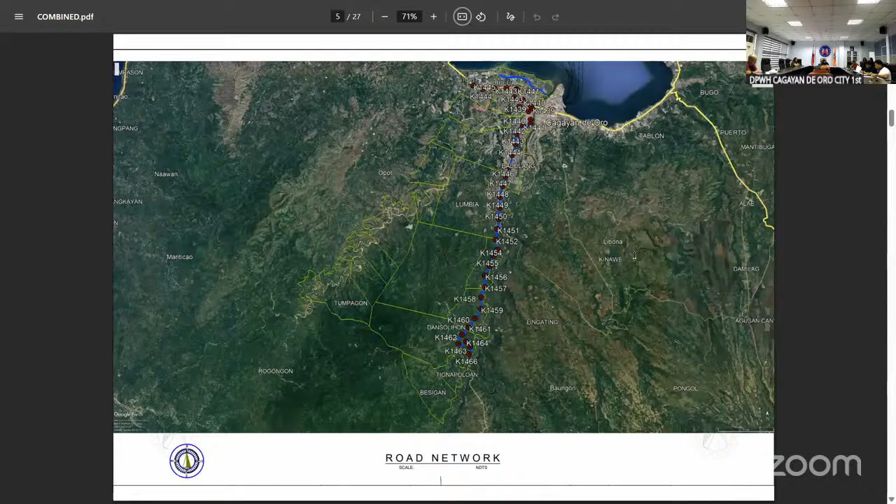There's also installation of solar LED roadway lighting with a height of 9 meters. So for the general drawing, this is located in Barangay Dansolihon. This is the vicinity map, and this is the site development plan. For specifics, this is the beginning, before the junction to the tertiary road. After this asphalt is the beginning, and the end is the station kilometer post 1462, after the junction of Dansolihon.

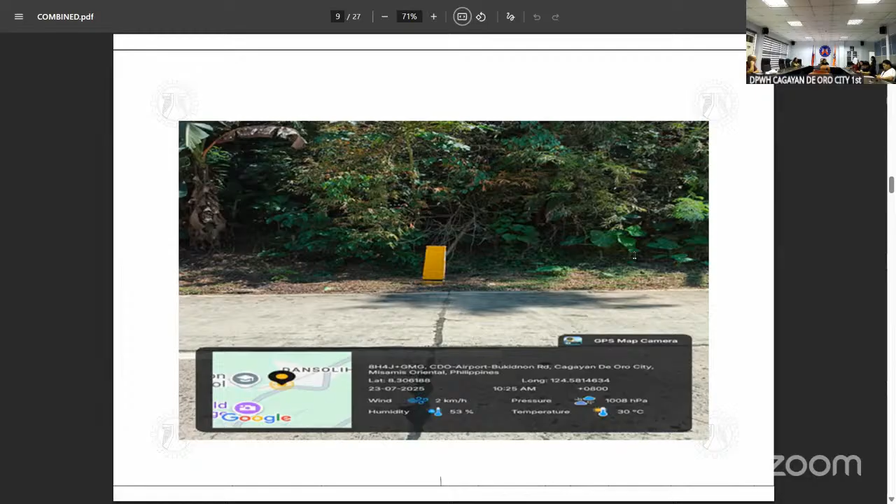So this is the disposal site plan. And for the plan and profile, this is the plan and profile.

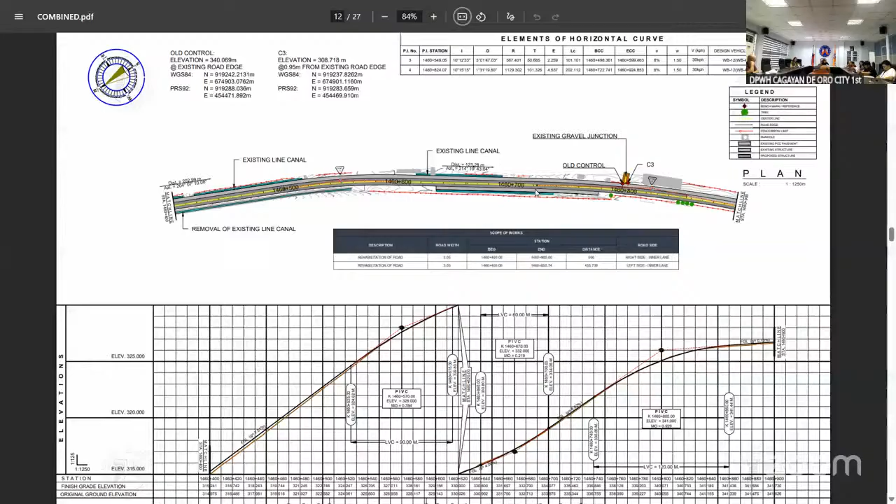So the scope of work is reflected here as per scope. You can see here there's a station limit at every scope of work, since not the whole length of this project will be rehab, since there's new roadway construction here. So for example, this one, there are limits to this rehabilitation. So this is a new paved road, the lighter gray. So the station limits of this project is reflected on this scope of work, also the station limits of the solar LED roadway lightings and the countings.

So this is the plan and profile, and this is the end. So this is the straight line diagram for clarification as to the station limits.

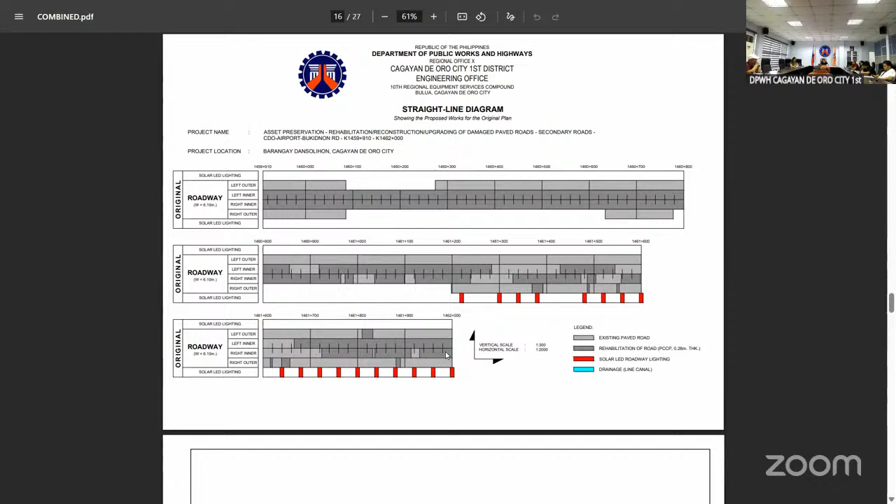So for typical drawings, this is the typical drawings wherein we have here, there's a section with 4 lanes. So again, this is the rehabilitation of inner lanes. There are also sections which have 2 lanes, so we will also have rehabilitation of these 2 lanes. Also this project is accompanied with reflectorized thermoplastic pavement markings and solar street lights, so you can see here on the right side.

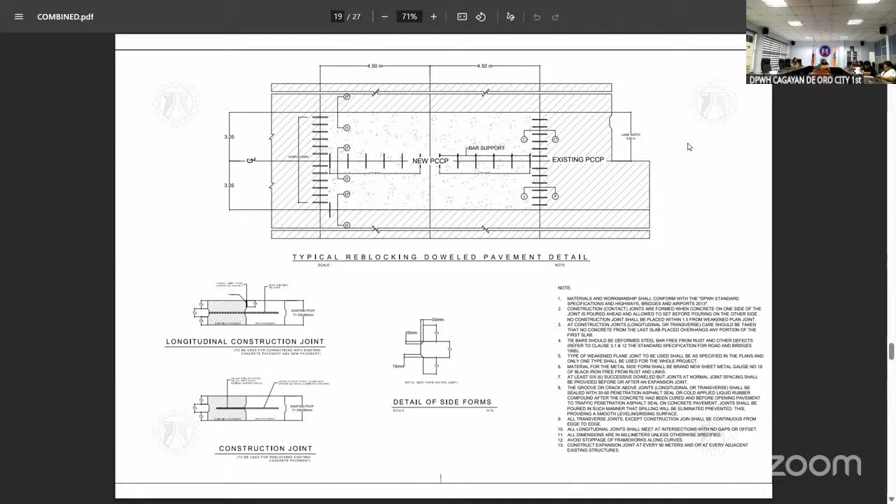So this is the reblocking details, the PCCP details or concrete pavement details, and geometric design standard drawings.

So for summary of quantities, we have here provision of field office for the engineer rental basis, 10.5 months. Permits and clearances, 1 lump sum. Project billboard and signboard, for each. Occupational safety and health program, 1 lump sum. Traffic management, 7.87 months. Mobilization, demobilization, 1 lump sum.

Removal of actual structure obstruction, 0.23 meters thick, PCCP unreinforced, 10,839.18 square meter. Surplus common excavation, 3,965.47 cubic. Structure excavation common soil, 28.51 cubic. Embankment from roadway structure excavation, 84.7 cubic. Gravel fill, 2.59 cubic. Aggregate base course, 2,167.84 cubic meters. Portland cement concrete pavement unreinforced, 0.28 meters thick, 14 days.

10,839.18 square meter. Reinforcing steel grade 40, 1,534.12 kilograms. Structural concrete, 13.18 cubic. Structural concrete painting works, 14.4 square meter. Reflectorized thermoplastic pavement markings white, 733 square meter, and for the yellow, 439.47 square meter. And for the single arm solar LED roadway lightings, 9-meter pole, 80 to 125 watts.

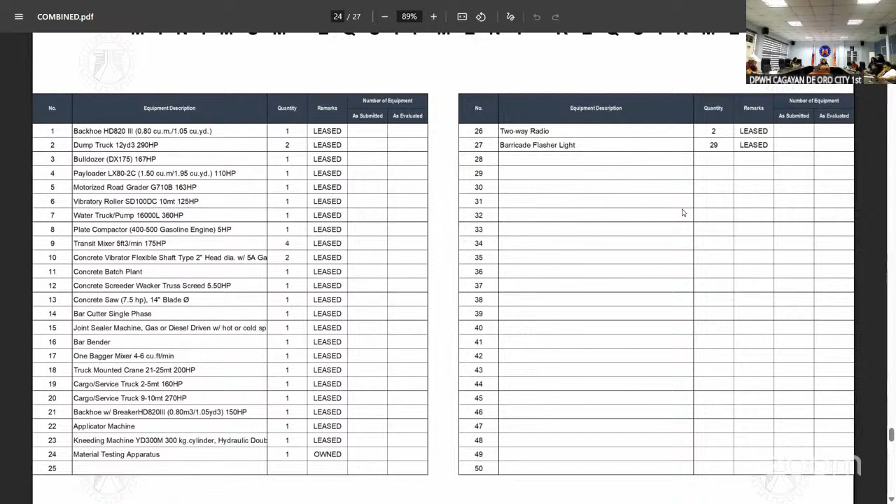For our traffic management, we have here two-way radio, again this is 2 leased, and barricade flasher light, 29 leased.

So for our inclusions of our pay items, we have here provision of field office for the engineer rental basis. The inclusion of this pay item is 20-footer container van with air conditioned unit furnished and maintained or equivalent, including 3 tables and 3 chairs. And for the permits and clearances, we have here NCIP permits and clearances as per memo order number R10 FBV 00395 series of 2025. So this is the specifications of our single arm solar LED roadway lighting.

So the rest of these slides are attachments. So this is the soil test reports. So that's all for this project. Thank you, and any questions?

So for the next budget, the programmer, engineer Aris Calizo, still will discuss the details of this project. Ahead, Aris.

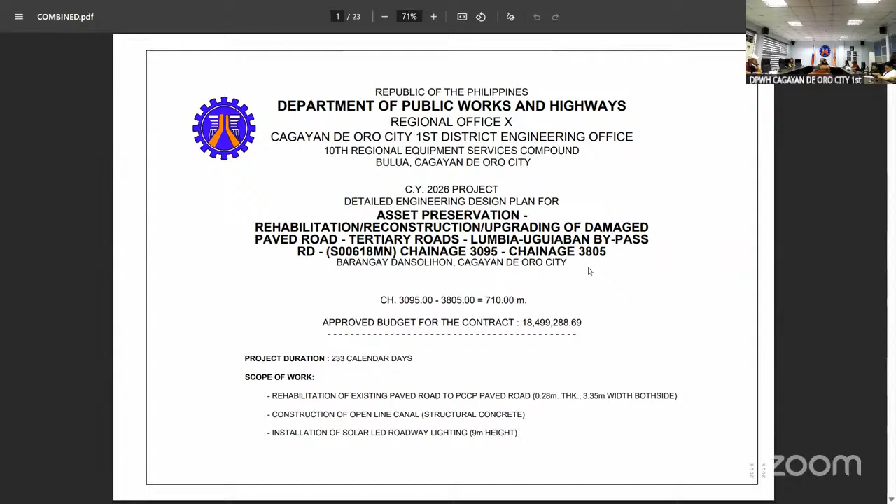There's also a construction of open line canals, material used is structural concrete, and also installation of solar LED roadway lightings, 9 meters high. So general drawing, again, this is located in Barangay Dansolihon.

This is at the bypass road, Mangalay. This is the end junction, the end section of this project, at the junction near the Talakag Bridge, boundary of Dansolihon to Talakag.

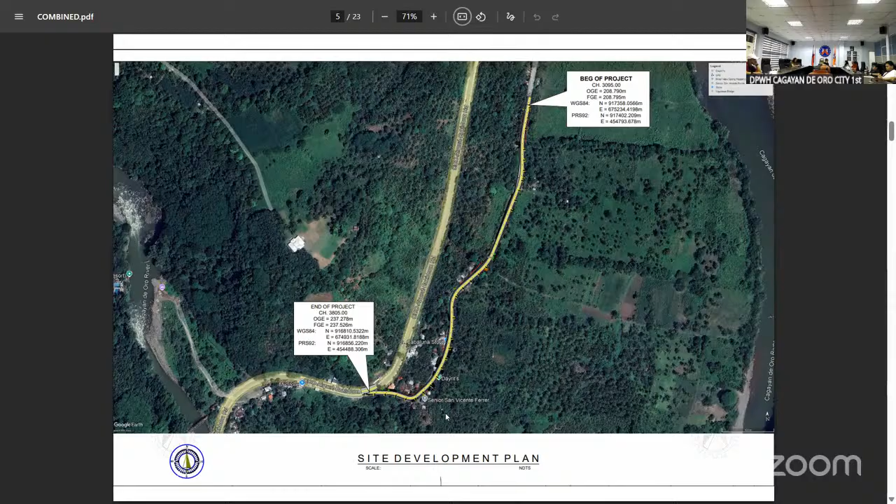So this is the site development plan. For specifics, again, this is the site images. We have here the beginning. After this asphalt road, we will be having the rehabilitation of road. And this is the image of the end.

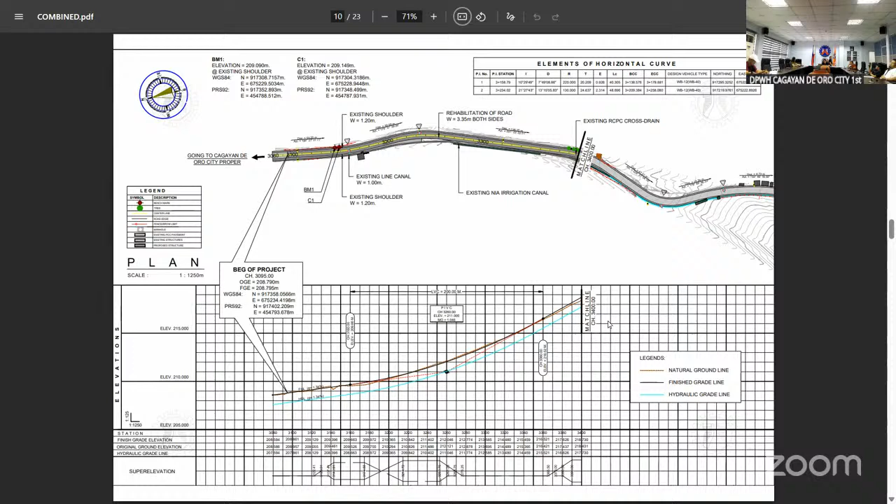So this is the site disposal site plan. For the plan and profile, this is the plan and profile wherein the scope of work is reflected. We have here the elements of curve and every scope of work. Also here we have the solar LED roadway lights location and the number, and again the every scope of work.

So for clarifications, this is the straight line diagram for clarity. For typical drawings, we have here the existing road is 3.35 meters both sides, and also in the site there's an existing shoulder which is newly built, which we will not be damaging. So we will be having a rehabilitation of the inner lanes, both sides, and also the construction of line canal.

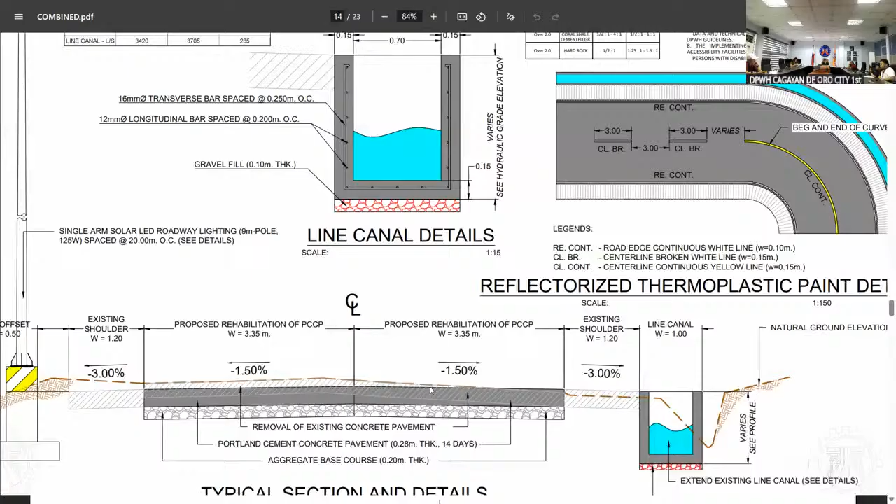This is the details. Along with this project, the whole length, there will be reflectorized thermoplastic pavement markings. So this is the details. Also, installation of solar LED roadway lightings. So this is again the reblocking details, the complete pavement details. So the geometric design standard drawings.

For the summary of the scope, we have here provision of field office for the engineer, rental basis, 7.77 months, permits and clearances, 1 lump sum, project billboard signboard for each, occupational safety and health program, 1 lump sum, traffic management, 5.8 months, mobilization and demobilization, 1 lump sum, removal of actual structure obstruction, 0.23 meters thick, PCCP unreinforced.

4,757 square meter surplus common excavation, 1,669.44 cubic meters structure excavation, 136.65 cubic meters, and gravel fill, 30.51 cubic meters.

For the aggregate base course, we have here 951.4 cubic meters. Portland cement concrete pavement unreinforced, 0.28 meters thick, 14 days.

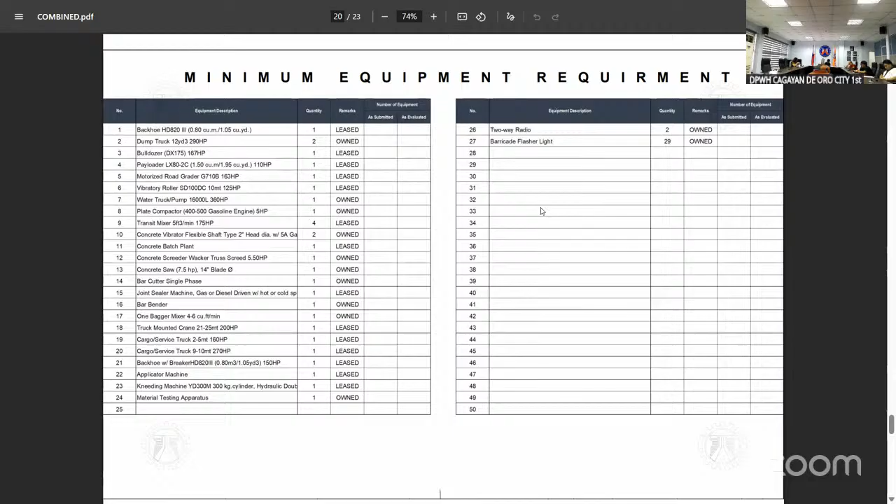For the minimum equipment requirement, we have here backhoe, 1 leased, dump truck, 2 owned, bulldozer, 1 leased, payloader, 1 leased, motorized road grader, 1 leased, vibratory roller, 1 leased, water truck pump, 1 owned, plate compactor, 1 owned, transit mixer, 4 leased, concrete vibrator, 2 owned, concrete batch plant, 1 leased, concrete screeder, 1 owned, concrete saw.

1 owned, bar cutter, 1 owned, joint sealer machine, 1 leased, bar bender, 1 owned, 1 bagger mixer, 1 owned, truck mounted crane, 21 to 25 metric ton, 1 leased, cargo service truck, 2 to 5 metric ton, 1 leased, cargo service truck, 9 to 10 metric ton, 1 leased, backhoe with breaker, 1 leased, applicator machine, 1 leased, kneading machine, 1 leased, and material testing apparatus, 1 owned.

For the traffic management, we have here two-way radio, 2 owned, and barricade flasher light, 29 owned.

So for the inclusions of our pay items, we have the provision of the field office for the engineer. The inclusion of this pay item is a 20-footer container van with air conditioned unit, furnished and maintained or equivalent, with 3 tables and 3 chairs. For the permits and clearances, the inclusion of this item is NCIP permits and clearances as per memo order number R10 FBV 00395 series of 2025.

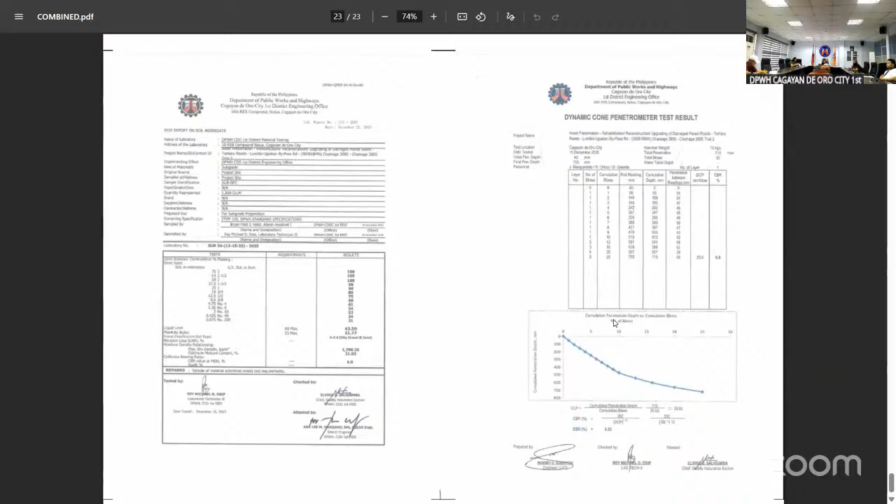Also this is the specification of our solar LED roadway lightings, 9-meter pole, 125 watts. So the rest of these are the attachments. This is the soil test reports. So that's all for this project. Thank you, and any questions?

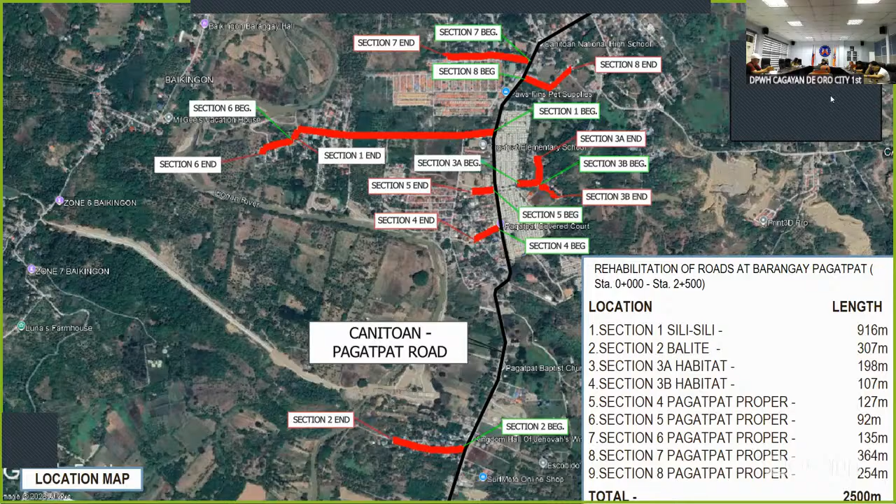Section 1, Sili-Sili, has a length of 916 meters. Section 2, Balite, 307 meters. Section 3A, Habitat, 198 meters. Section 3B, Habitat, 107 meters. Section 4, Pagatpat Proper, 127 meters. Section 5, 92 meters. Section 6, 135 meters. Section 7, 364 meters. And last, Section 8, 254 meters. The total length is 2,500 meters.

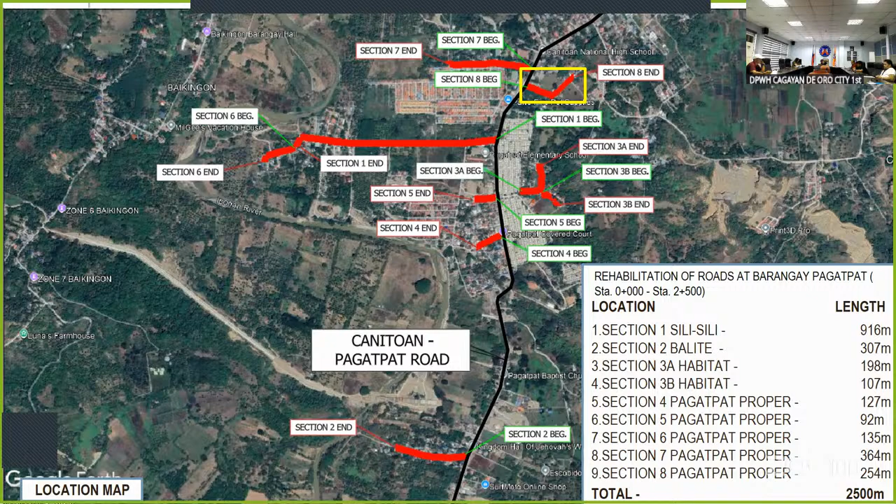This is the zoomed site image from Google Maps of Section 1, Sili-Sili. As you can see, the beginning of the project is near Pagatpat Elementary School, and the end of the project is near the Sili-Sili Covered Court. This is the plan and profile of this project.

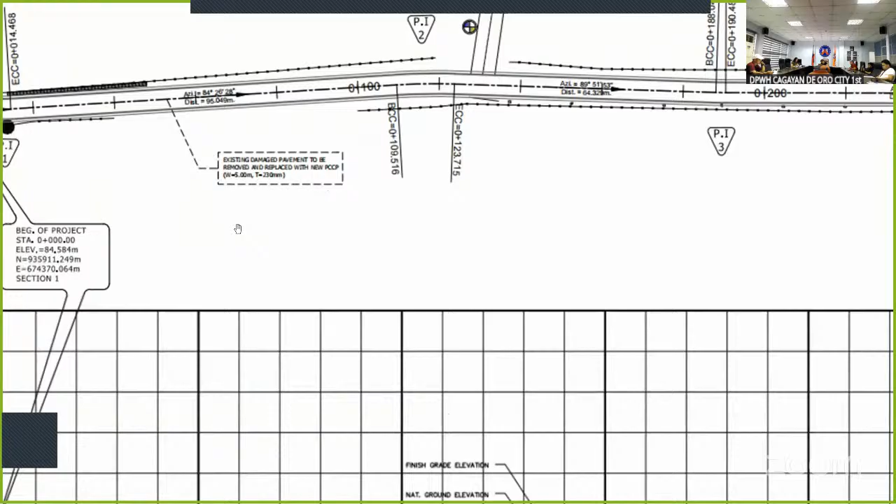The scope of works is existing damaged pavement to be removed and replaced with new PCCP. This is the site images of the beginning and end of the section.

In Section 2, Balite, we have 307 meters in length. The beginning of the project is near the Kingdom Hall of Jehovah's Witnesses, and the end of the section is near Laguna Residence.

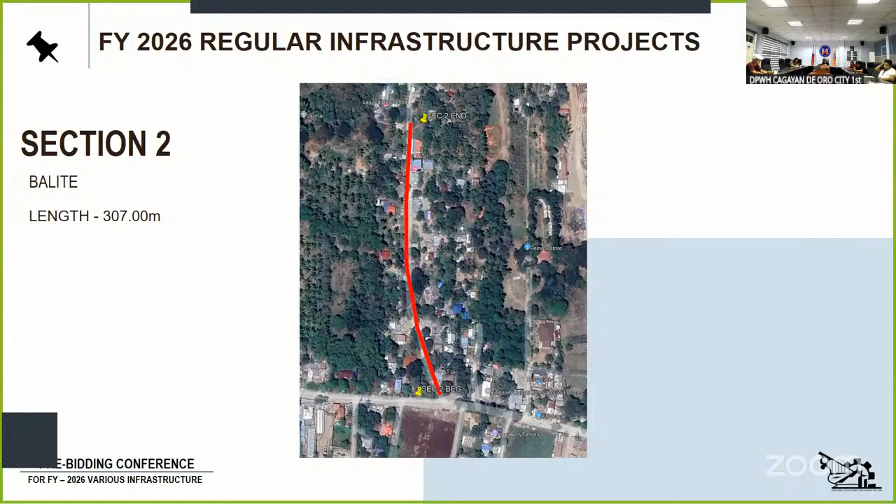This is the scope and the plan and profile of the section. The scope of works of this section is proposed construction of road. This is the site images of the beginning and end of the section.

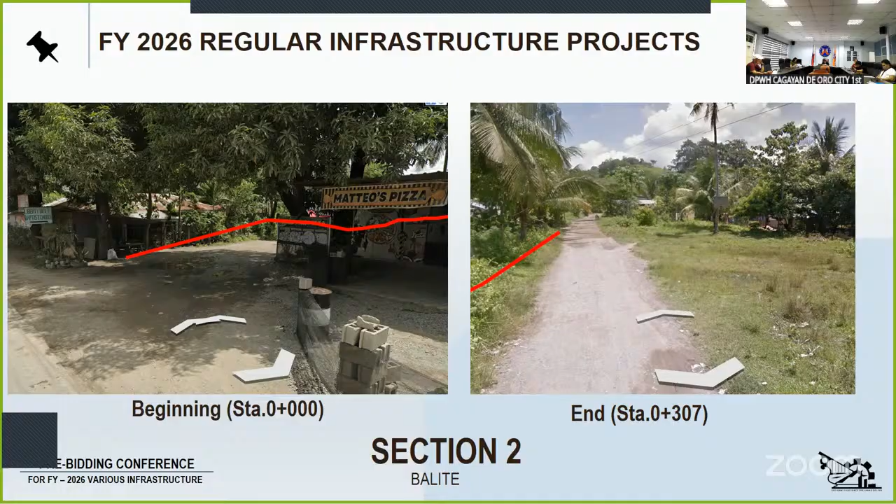So we have Section 3A, Habitat, with 198 meters in length. The beginning of the project is at the back of Pagatpat ECD Child Development Center. This is the plan and profile of the section. The scope of work is proposed construction of road.

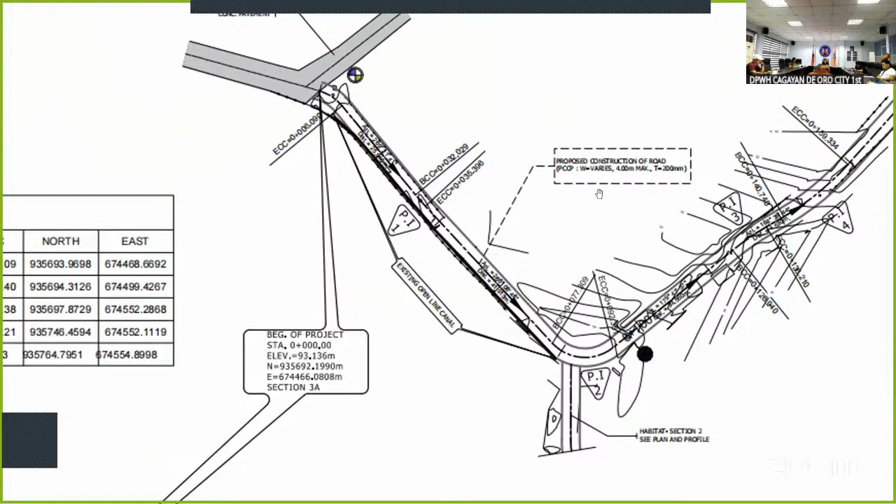So we have Section 3B, which connects to Section 3A. We have 107 meters. The plan and profile is the same. We have proposed construction of road.

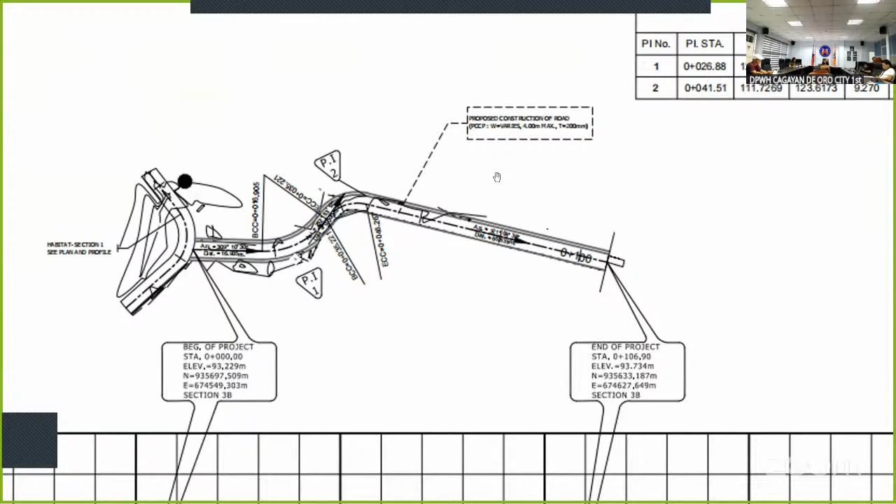In Section 4, Pagatpat Proper, the beginning of the section is beside Pagatpat Covered Court, and the end is beside the chapel. This is the plan and profile of this section. The scope of works is existing damaged pavement to be removed and replaced with new PCCP. This is the site images of the beginning and end of this section project.

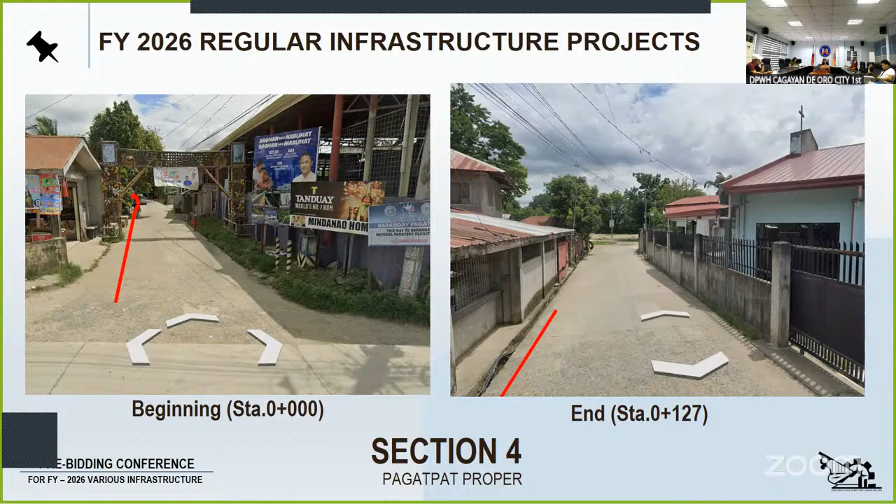In Section 5, we have 92 meters, and the beginning of the project section is near the Pagatpat ECD Child Development Center. The end connects to the existing road. This is the plan and profile of the section, and the scope of works is proposed construction of road.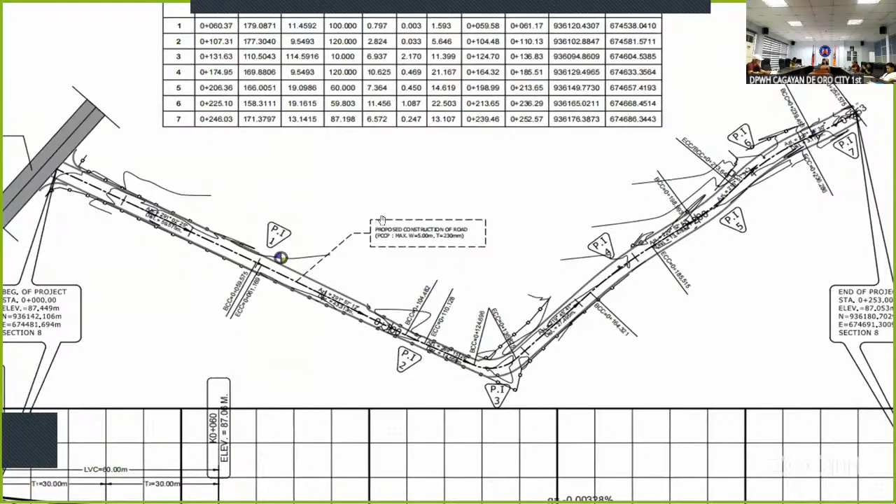Last, Section 8, we have 253 meters. The beginning of this project is near RG Fuel. This is the plan and profile. The scope of works of this section is also proposed construction of road. This is the site images of the beginning of the section.

So this is the typical road section.

So our summary of quantities: permit and clearances, one lump sum; project billboard or signboard, each; occupational safety and health program, one lump sum; traffic management, one lump sum; mobilization and demobilization, one lump sum; removal of actual structure or obstruction; 0.23-meter thick PCCP unreinforced, 5,215 square meters; surplus common excavation, 4,437.44 cubic meters; structure excavation common soil, 209.52 cubic meters; embankment from borrow common soil, 43.4 cubic meters; aggregate base course,

2,360.54 cubic meters; Portland cement concrete pavement unreinforced, 0.23 meter thick, 14 days, 12,901.6 square meters; reflectorized thermoplastic pavement markings, white 644.45 square meters, yellow 98.66 square meters.

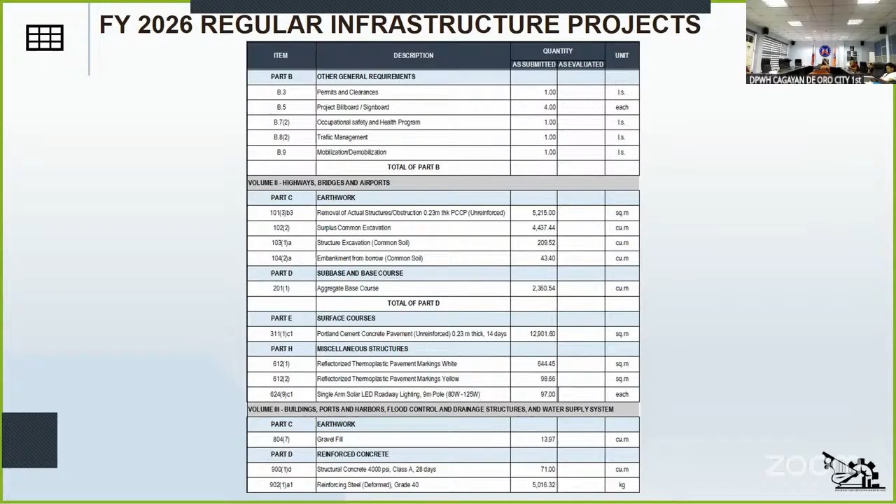Then single arm solar LED roadway lighting, 9-meter pole, 80 watts to 120 watts, 97 each. Gravel fill, 13.97 cubic meters. Structural concrete, 4,000 PSI, Class A, 28 days, 71 cubic meters. Reinforcing steel deformed, grade 40, 5,016.32 kilograms. So we have the permit and clearances as the excavation permit as per ordinance.

So this is the minimum equipment requirement to be used: two-way radio, own barricade flasher, and own trailer.

For equipment: one leased concrete vibrator, two owned concrete screeders, one owned concrete saw, one owned mechanized joint sealer, one owned plate compactor, one leased vibratory roller, one leased motorized road grader, one leased dump truck, two leased transit mixers.

One leased concrete batch plant, one leased chainsaw, one leased boom truck, one leased backhoe with pavement breaker, one leased water truck, one leased bulldozer, one leased payloader, one leased backhoe, one leased bar cutter single phase, one owned bar bender.

Three phase, one owned bagger mixer, one owned applicator machine, one leased kneading machine, one leased cargo or service truck, one leased truck mounted crane, and one leased laboratory testing apparatus set.

And that's all, thank you.

Are there any questions or concerns? Any concern? Sir?

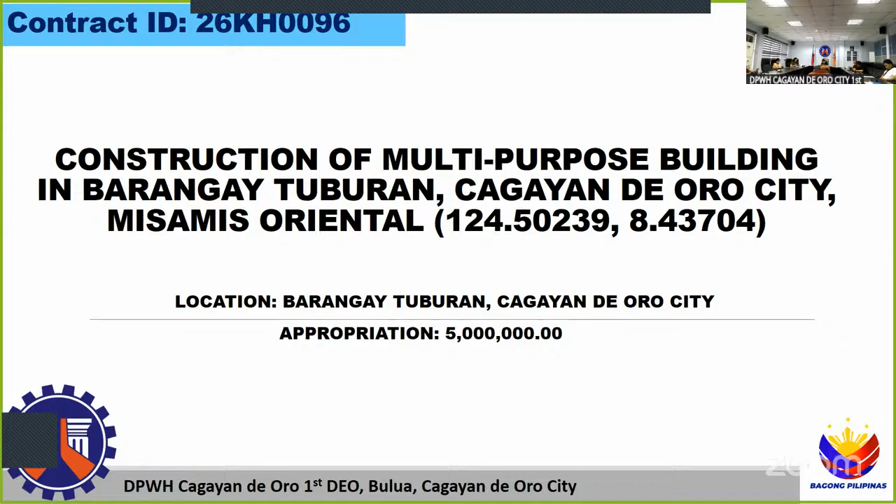The approved budget for contract for this project is 4,947,896.16 with a calendar duration of 180 days.

The major category is BICWA PLC, buildings construction without piles, low-rise concrete frame, and the similar major category is BICWO-PHC, buildings construction without piles, high-rise concrete frame.

The scope of work for this project is construction and improvement of the multipurpose building and the stage, with an overall building component dimension of 12 meters by 12 meters and an area of 144 square meters, and a new stage with dimensions of 12 meters by 5 meters, including architectural, structural, plumbing, and electrical works as per approved plans of the POW and standard specifications.

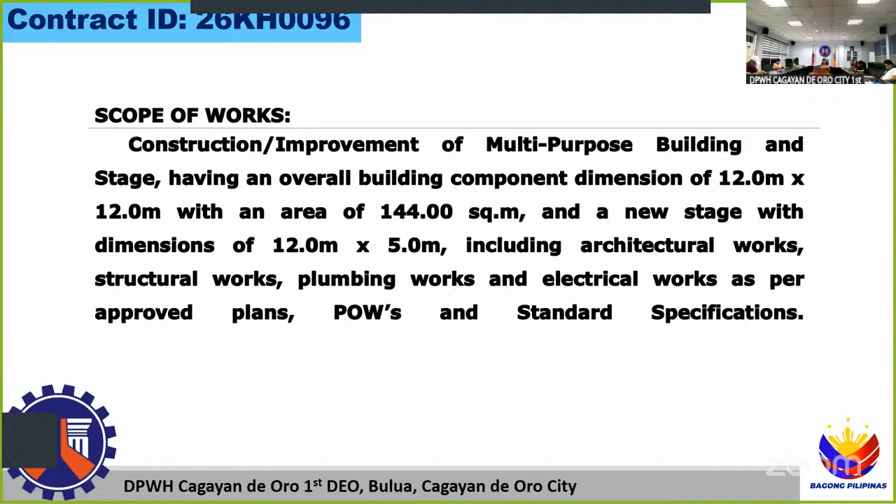This is our location plan inside the Tuburan National High School, and these are our site photos.

As you can see, we have existing structures, mainly the covered court itself, the stage, and the concrete slab.

The stage is to be removed and constructed with a new one. This is our perspective.

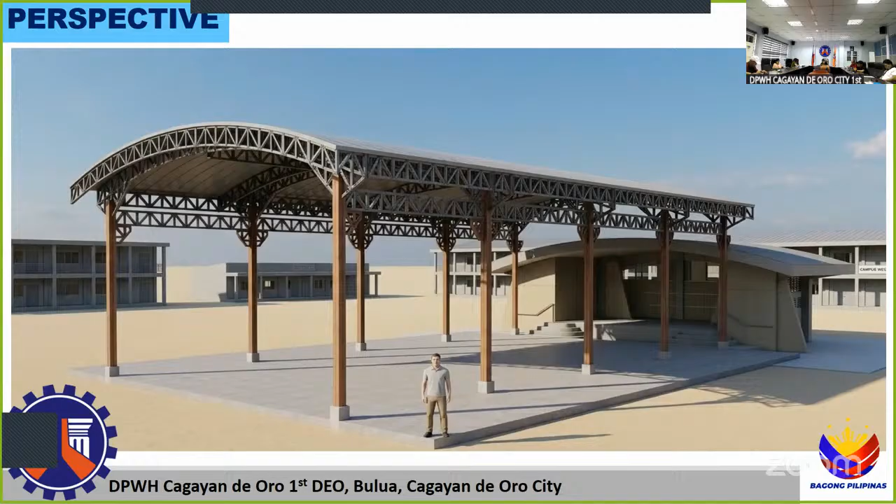The existing slab will also be extended with a new concrete slab.

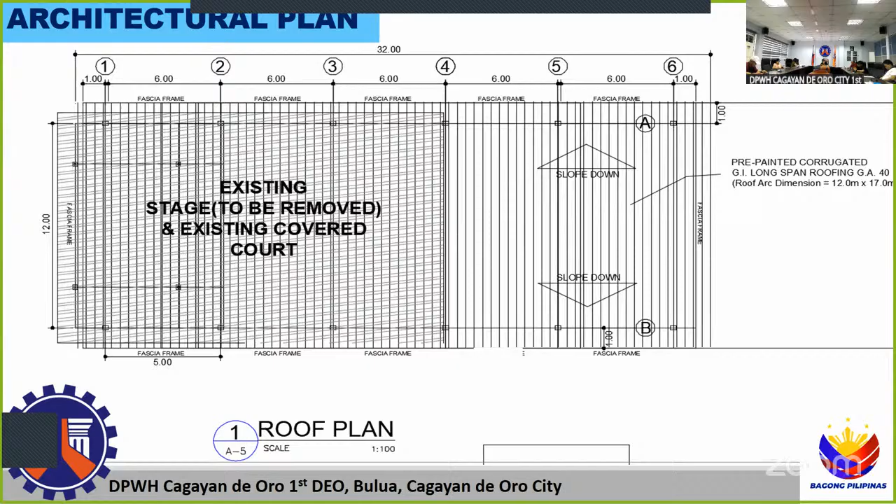For the architectural plan, we have the front elevation, the left side elevation, the floor plan, the cross section, and the roof plan with pre-painted corrugated roof, dual slope.

And the foundation plan of the covered court with a 100 mm thick slab on fill.

For the structural plan, we have the foundation plan for the stage, floor plan with a dressing room for female and male, and ME and EE room with a utility and also toilet.

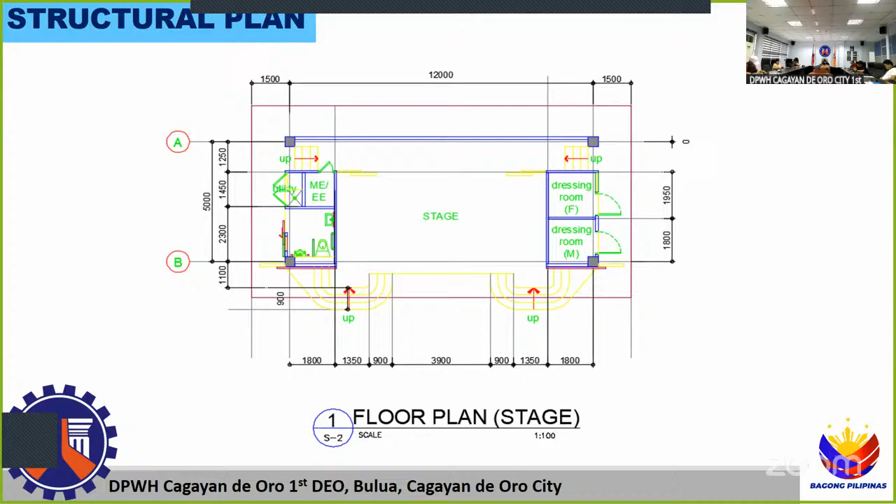We have our details such as the pedestal, the I-beam column joint, the stiffener plate, footing detail, and typical section.

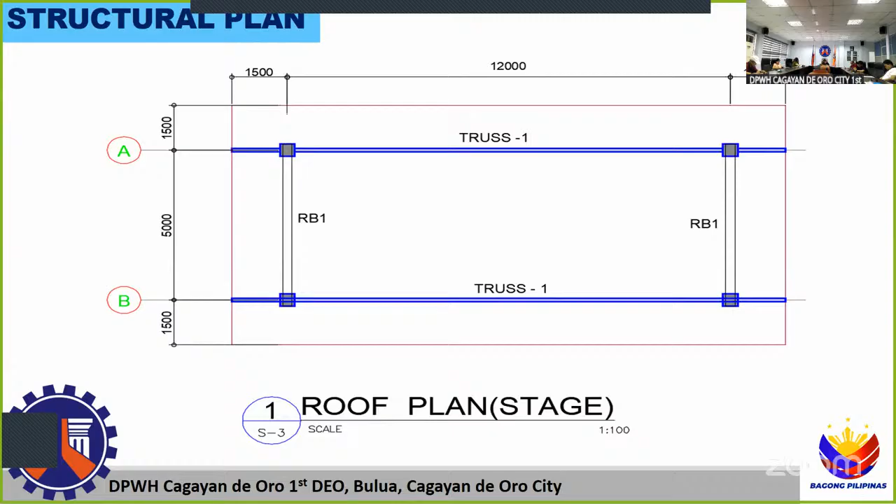The roof plan for the stage and its roof framing plan.

This is our truss detail, and the fascia frame detail.

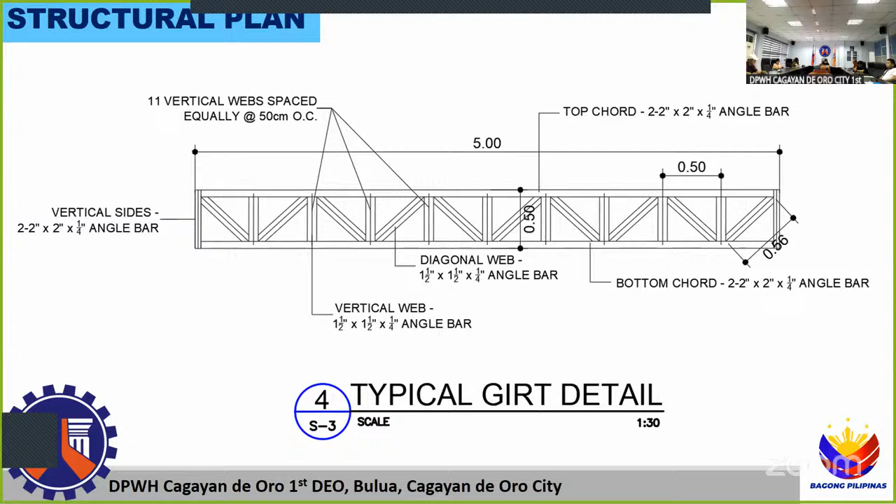For the typical girt detail, the strut detail, and the I-beam and stiffener plate detail.

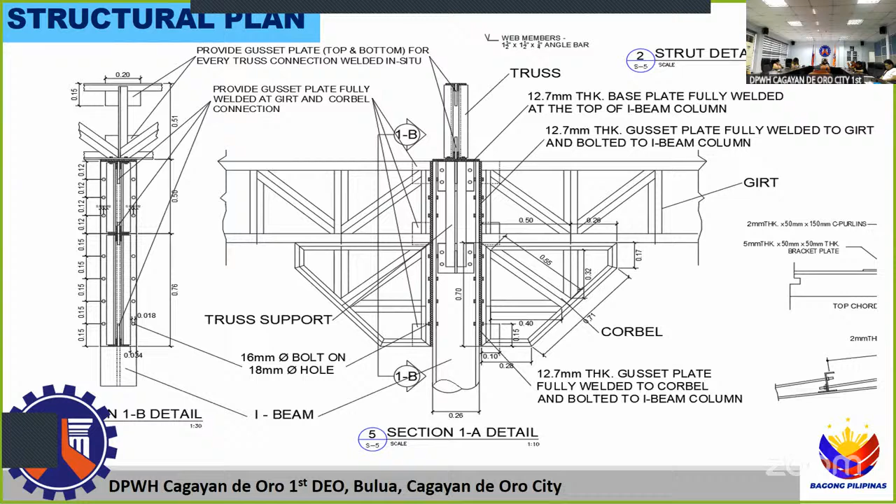Detail for our trusses and also its connections, and the subrod details.

Now for our summary of quantities: Part B, other general requirements. B31, permit and clearances, 1 lump sum. B51, project billboard signboard, 2 each. B71, occupational safety and health program, 1 lump sum. B91, mobilization and demobilization, 1 lump sum.

For Part C, earthworks: 801, removal of structure and obstruction, 1 lump sum. 803 1A, structure excavation common soil, 133.78 cubic meter. 804 1A, embankment from roadway, structure excavation common soil, 133.78 cubic meter. 804 2A, embankment from borrow common soil, 147.43 cubic meter. 847, gravel fill, 43.83 cubic meter.

For Part D, reinforced concrete: 901C, structural concrete 3,000 PSI Class A 28 days, 29.43 cubic meter. 902C, structural concrete Class B 28 days, 33 cubic meter. 902 1A1, reinforcing steel deformed grade 40, 3,166.80 kilograms. 903 2, formworks and falseworks, 204.09 square meter.

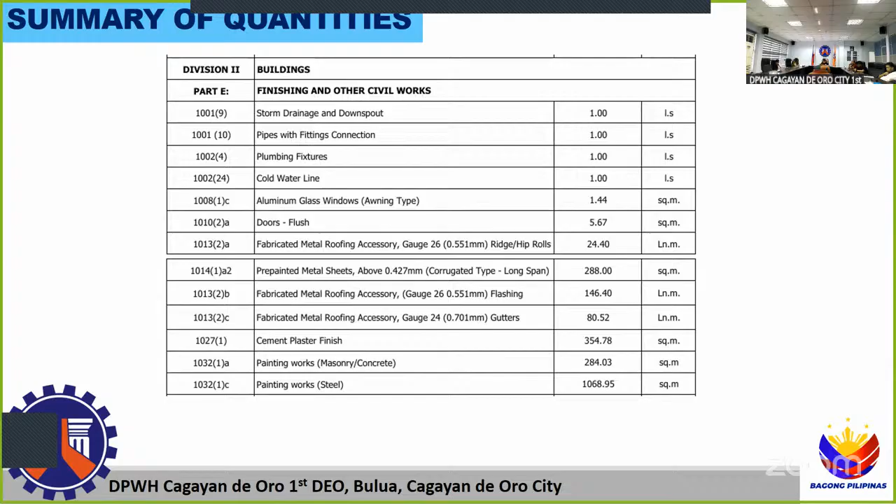1032 1C painting works steel, 1068.95 square meter. 1046 2A1 CHB non-loading bearing, 100 mm, 197.15 square meter. 1047 4B metal structure accessories, turnbuckle, 20 each.

1047 5A metal structures, bolts and rods, 36.50 kilograms. 1047 5B metal structure accessories, subrods, 113.76 kilograms. 1047 5C metal structure accessories, cross bracing, 133.90 kilograms.

1047 5D metal structure accessories, steel plates, 874.99 kilograms. 1047 8A structural steel trusses, 7,920.58 kilograms. 1047 8B structural steel purlins, 1,242 kilograms.

For part F, electrical: 1110 conduits, boxes, and fittings, 1 lump sum. 1101.33 wires and wiring devices, 1 lump sum. 1102 1 panel board with main and branch breakers, 1 lump sum. 1103 1 lighting fixtures and lamps, 1 lump sum.

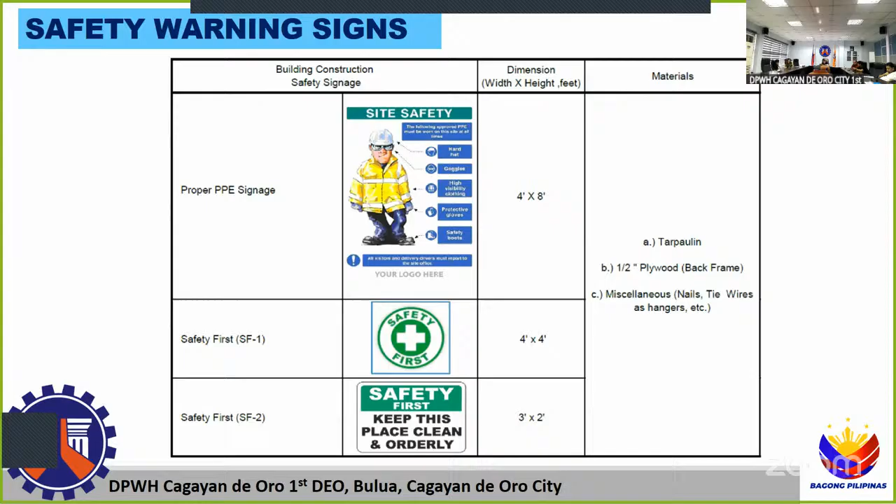For our safety warning signs, we have the proper PPE signage: safety first SF1, safety first SF2, hard hat area, danger deep excavation, beware of falling debris, construction entrance, construction exit, safety harness required, welding, hot work area, authorized personnel only, fall hazards, and temporary material stocking area.

For our summary of quantities, the lump sum items are the storm drainage and downspout, and for our electrical, the conduits, boxes, and fittings.

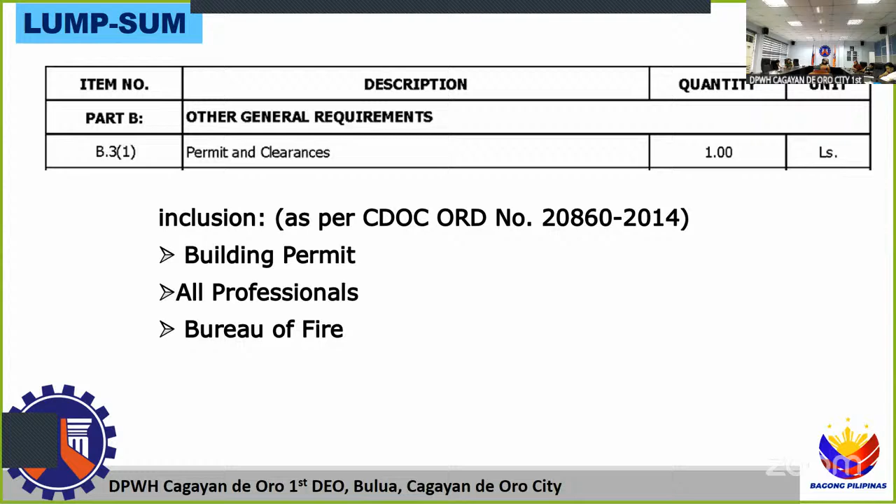For our permits and clearances, it includes the building permit, all professionals, and also for the Bureau of Fire.

For our MER or minimum equipment requirement, we have the backhoe, 1 unit leased; concrete vibrator, 2 units owned; dump truck, all models, 1 unit owned; bagger mixer, 1 unit owned; plate compactor, 1 unit owned; grinding machine with accessories, 1 unit owned; bar cutter, 1 unit owned; bar bender, 1 unit owned; welding machine, 1 unit owned; boom truck, 1 unit leased; material testing apparatus, 1 set owned; minor tools, 1 set owned; and the jackhammer, 1 unit owned. And that is all.

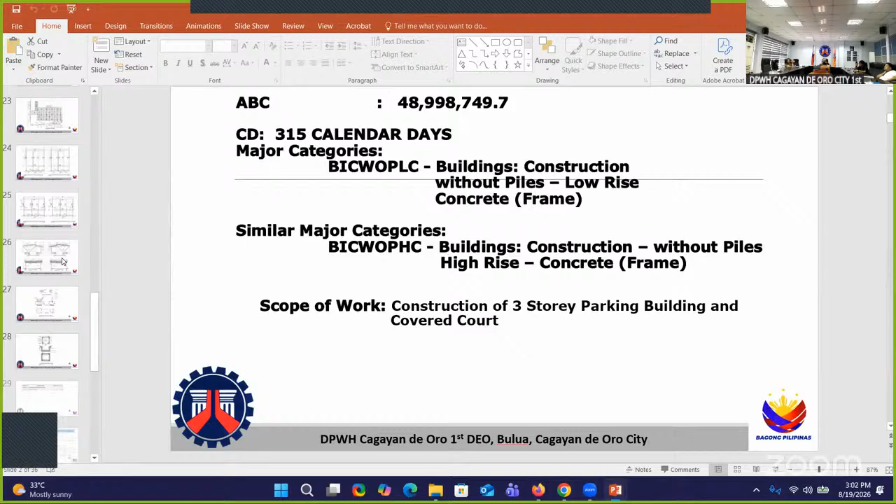Good afternoon. I'll be discussing the construction of a multipurpose building, DPWH Cagayan de Oro City, First District Engineering Office, Bulua, Cagayan de Oro City.

The approved budget for contract is 48,998,749 pesos and 70 centavos. We have the contract duration of 315 calendar days.

The major categories are building construction without piles, low-rise concrete frame, and similarly building construction without piles, high-rise concrete frame. The scope of work is construction of a 3-story parking building and covered court.

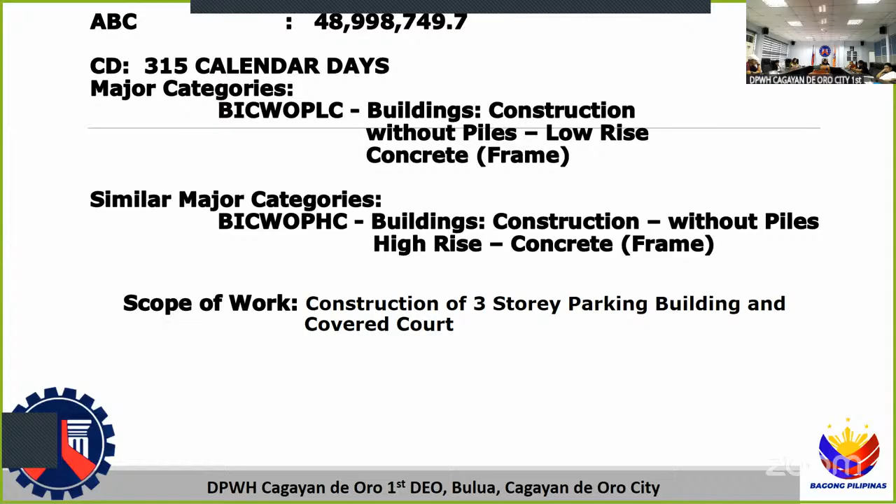The location plan is at the DPWH Cagayan de Oro City First District. The scope of work is construction of the car parking building. As you can see, we have the rendered images of the car parking building and also the covered court.

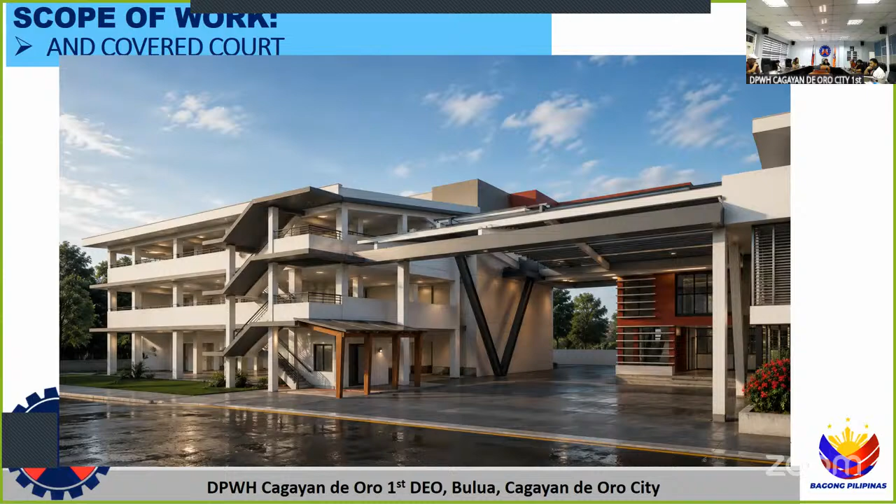In the architectural plan, this is the ground floor plan. You can see we have 2 buildings, the parking building and covered court. The parking building has 7 to 8 parking slots. Beside it is the guardhouse, then the stair exit, and we have the car elevator shaft, then a bridge connecting to the existing building.

This is the second floor plan, with 8 slots of car parking. Then in the third floor, 8 slots.

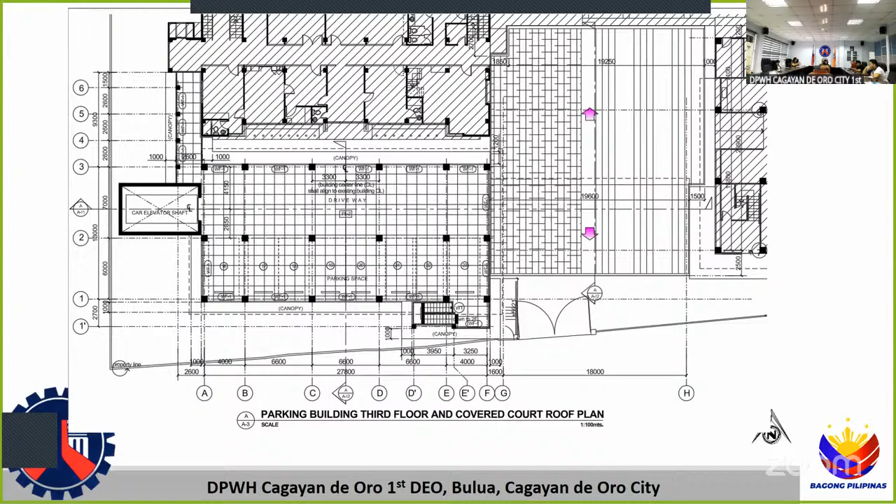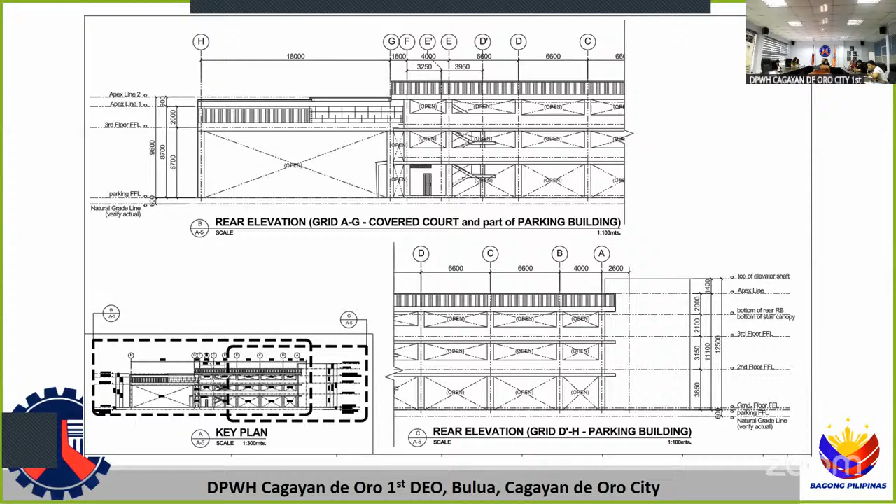This is the front elevation of the parking building and the covered court, and the rear elevation of both buildings. Then the covered court, the right side elevation and left side elevation, and the cross section of both buildings.

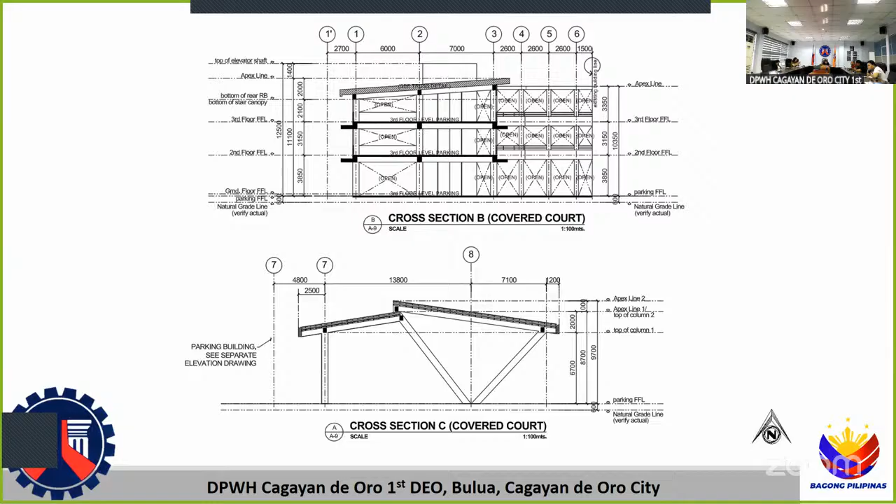This is the ground floor level reflected ceiling plan, then the second floor, then the third floor. This is the roof plan, the stair detail, and the car elevator details.

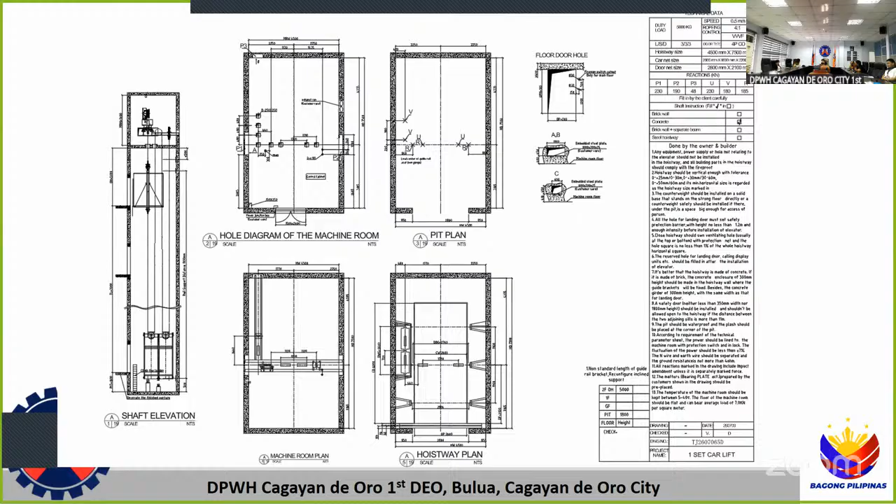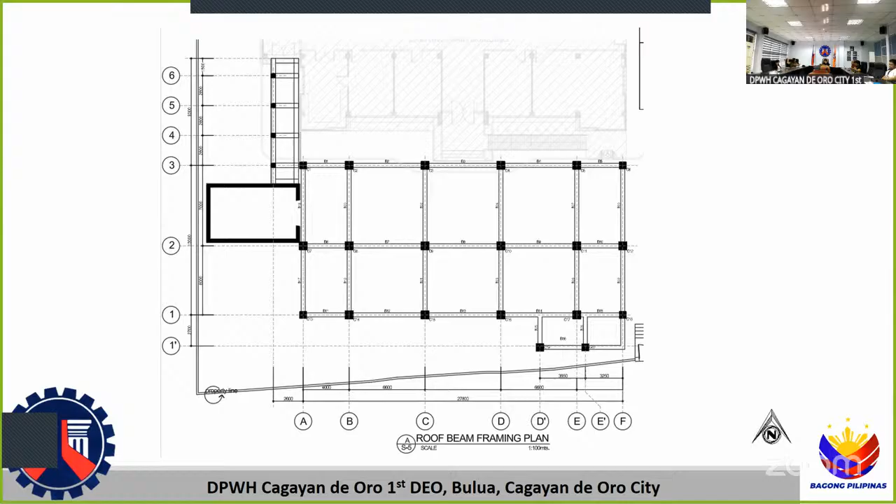In the structural plan, you have the foundation plan, ground floor framing plan, second and third floor framing plan, then the roof beam framing plan, then the roof framing plan.

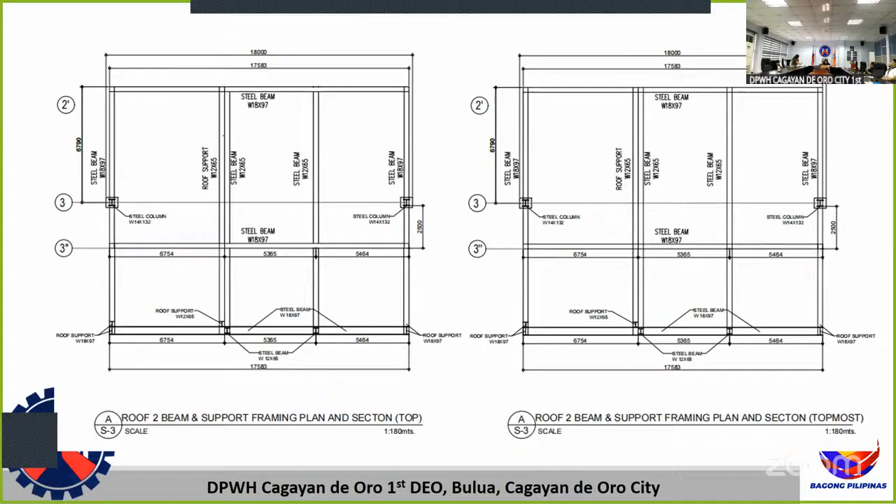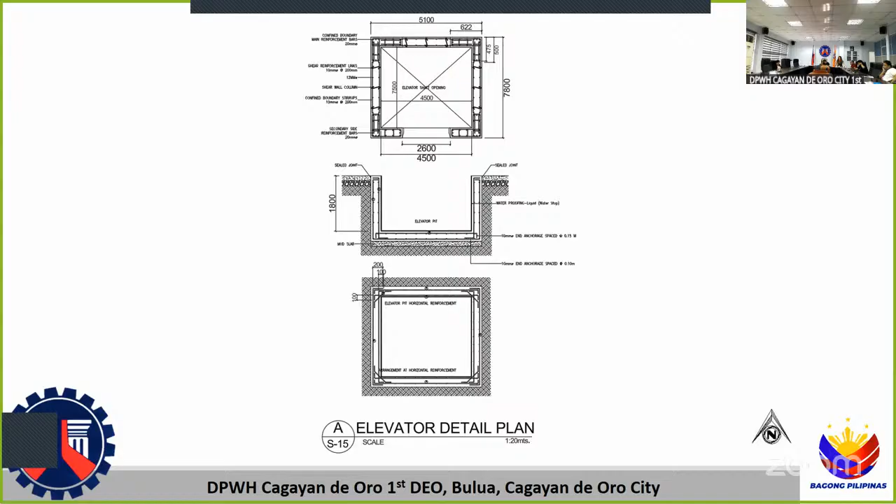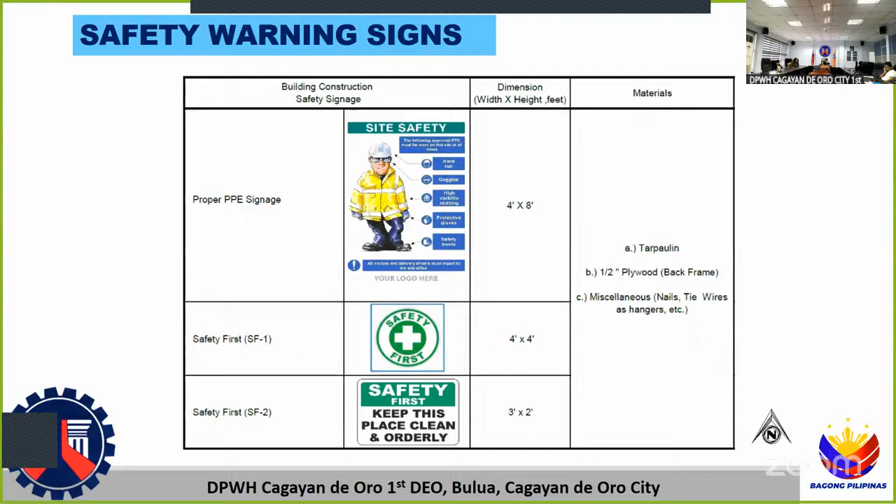So for the summary of quantities, we have permit and clearances, 1 lump sum; project billboard or signboard, each; occupational safety and health program, 1 lump sum; mobilization and demobilization, 1 lump sum; removal of structure and obstruction, 1 lump sum; structure excavation common soil.

713.04 cubic meters. Embankment from roadway or structure excavation common soil, 1052.39 cubic meters. Gravel fill, 109.99 cubic meters.

Structural concrete, 3,000 PSI, class A, 28 days, 548.39 cubic meters. Structural concrete class A, 28 days, 126.03 cubic meters. Structural concrete class B, 28 days, 36.14 cubic meters. Reinforcing steel deformed, grade 40.

227,223.77 kilograms. Formworks and false works, 3,857.19 square meters. Soil poisoning, 32 liters. Storm drainage and downspout, 1 lump sum. Pipes with fittings connection, 1 lump sum.

Plumbing fixtures, 1 lump sum. Stainless steel grab bar, 40 millimeter diameter, 5.87 linear meter. Facial mirror, 0.54 square meter. Cold water line, 1 lump sum. Ceiling, 4.5 millimeter thick metal frame fiber cement board, 4 square meter.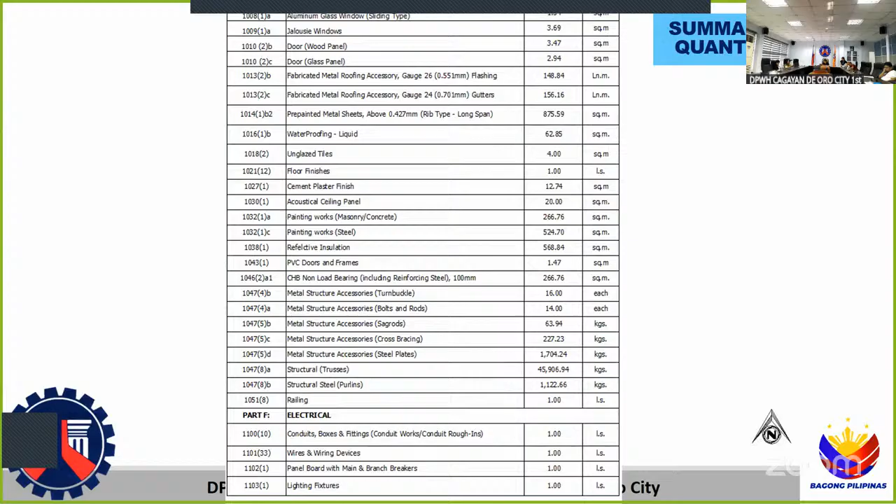1,122.66 kilograms. Railing, 1 lump sum. Conduits, boxes, and fittings, 1 lump sum. Wires and wiring devices, 1 lump sum. Panel board with main and branch breakers, 1 lump sum. Lighting fixtures, 1 lump sum.

Then we have the minimum equipment requirement to be used. Stake truck cargo, 1 unit leased. Concrete vibrator, 2 units owned. Backhoe, 1 unit leased. Dump truck, 1 unit leased.

1 bagger mixer, 1 unit owned. 1 bar cutter, 1 unit owned. Bar bender, 1 unit owned. Welding machine, 500 ampere, 1 unit owned. Cutting outfit, 1 unit owned. Material testing apparatus, 1 set owned.

Minor tools, 1 set owned. Boom truck, 1 unit leased. Plate compactor, 1 unit owned. Jackhammer, 1 unit owned.

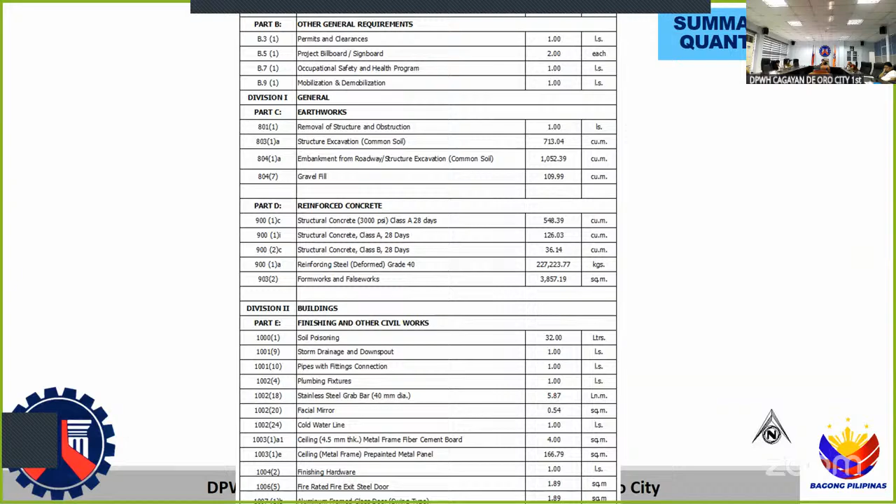And reminders for the summary of quantities: the summary of quantities is subject to bid bulletin. And that's all, thank you.

Yeah, are there any questions, clarifications? On the viewers, is that?

So let's now proceed to the mechanics of the procurement of these five civil works, especially the submission of bids, the buying of tender documents, submission of the bids, and the opening, to be discussed by Engineer Lorono from the BAC Secretariat.

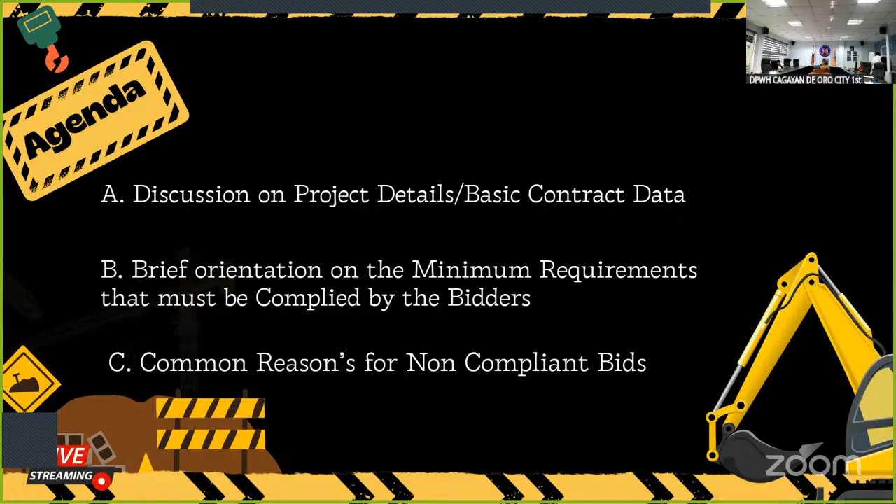So for the agenda, first we will discuss the project details and basic contract data as discussed earlier. Next, we have the brief orientation and the minimum requirements that must be complied by the bidder. And lastly, we have the common reasons for the non-compliant bids.

For the electronic submission, the details are stated in the bid data sheet in accordance with Department Order 87, Series of 2020.

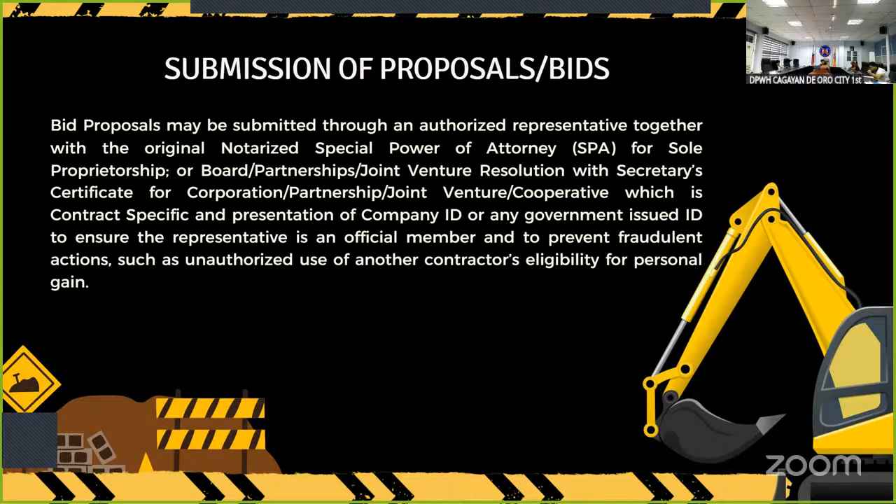Bid proposals may be submitted through an authorized representative together with the original notarized special power of attorney or SPA for sole proprietorship, or board or partnership joint venture resolution with secretary certificate for corporations, partnerships, joint ventures, or cooperatives, which is contract specific, and presentation of a company ID or any government issued ID to ensure the representative is an official member and to prevent fraudulent actions such as unauthorized use of another contractor's eligibility for personal gain.

First, we have the requirements for the first envelope. The bidder must provide a current, valid, and updated PhilGEPS registration certificate in Platinum membership. Failure of the bidder to update the PhilGEPS certificate of registration shall result in an automatic suspension of the bidder's certificate.

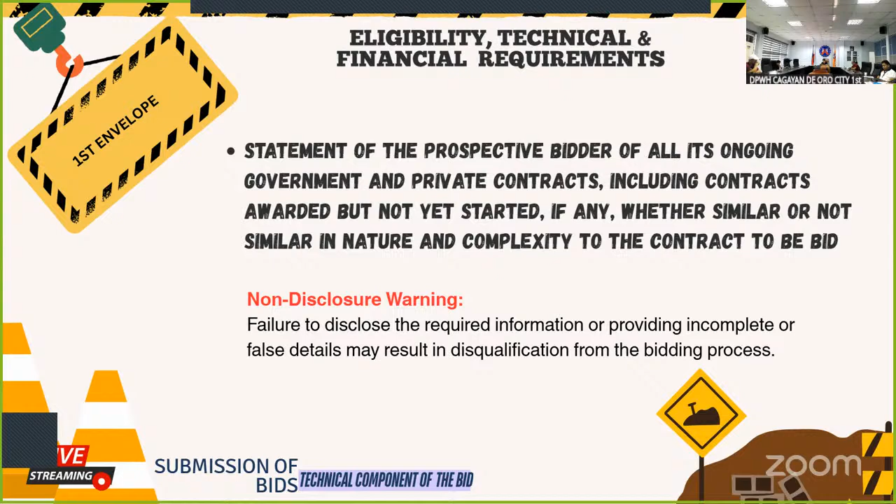Next, the bidder must provide a statement of all its ongoing government and private contracts, including contracts awarded but not yet started. Please take note that failure to disclose the required information, or providing incomplete or false details, may result in disqualification from the bidding process.

Next, the bidder must provide a statement of the single largest completed contract, or SLCC, the Philippine Contractors Accreditation Board or PCAB license, or special PCAB license in case of a joint venture.

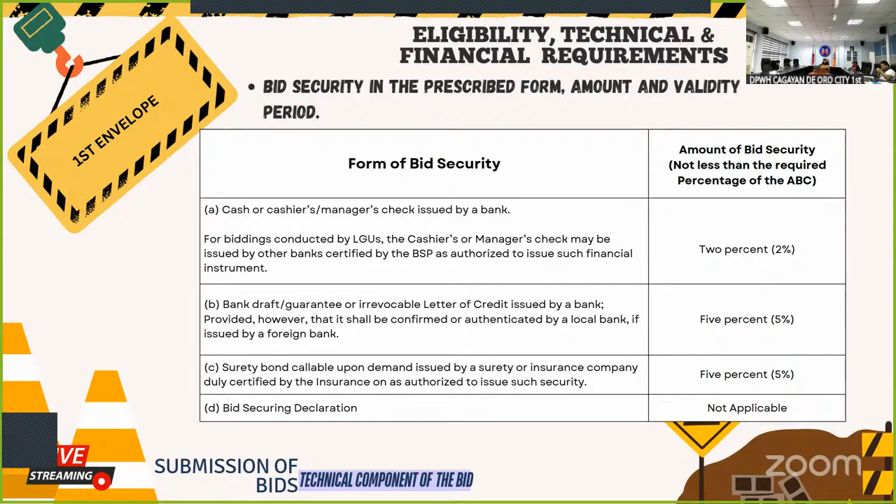The bidder must also provide the bid security. We have 4 forms of bid security, and the bidder will only choose one form to be submitted. These are the cash or cashier's check, the bank guarantee, the surety bond, and the bid securing declaration, with their corresponding amount of bid security.

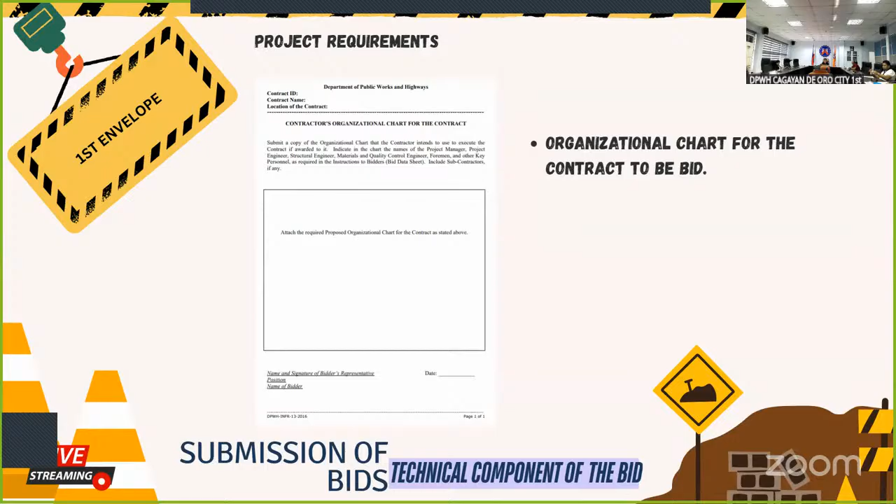Next, the bidder must provide an organizational chart for the contract to be bid, and also the list of contractors' key personnel and the list of contractors' major equipment and laboratory units, which are owned, leased, or under purchase agreement. Also, an additional requirement is the ISO 9001:2015 certification for projects with an approved budget for the contract exceeding 30 million pesos.

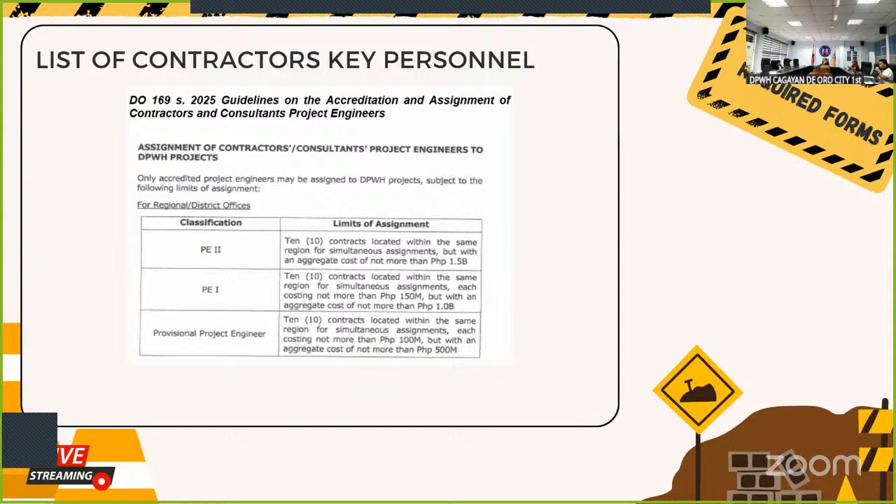Here is the standard form for the list of contractors' key personnel. Please also see Department Order 169 series of 2025, the guidelines for the assignment of contractors' and consultants' project engineers to the project. Here we have the classification of project engineers with their corresponding limits of assignment, and also DEO 111 series of 2018 for the guidelines on the assignment of accredited DPWH materials engineers.

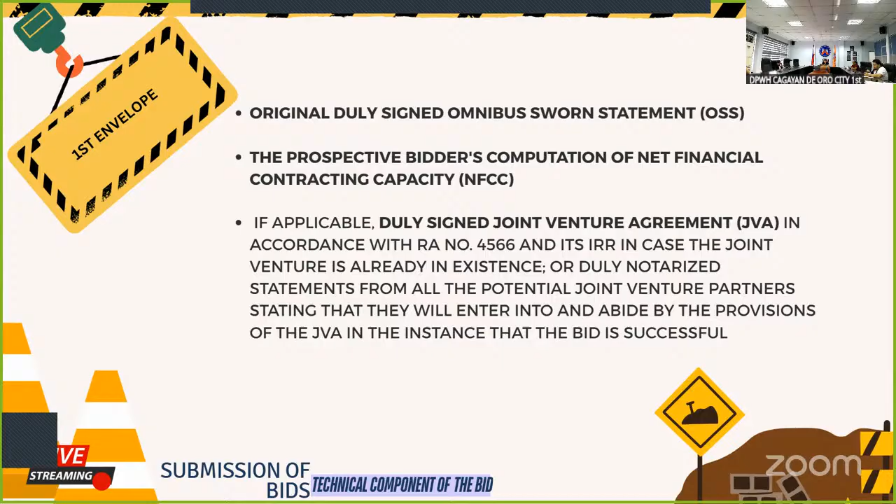The bidder must also provide an original and duly signed omnibus sworn statement, the net financial contracting capacity, and a joint venture agreement, if applicable. This is the standard form for the omnibus sworn statement.

An additional requirement is the latest General Information Sheet reflecting the beneficial ownership information, duly received by the Securities and Exchange Commission for corporations, in accordance with Section 54.3 of the IRR.

Next, for the second envelope, we have the financial requirements. The bidder must provide an original and duly signed financial bid form, the bill of quantities, the detailed estimates, and the cash flow by quarter.

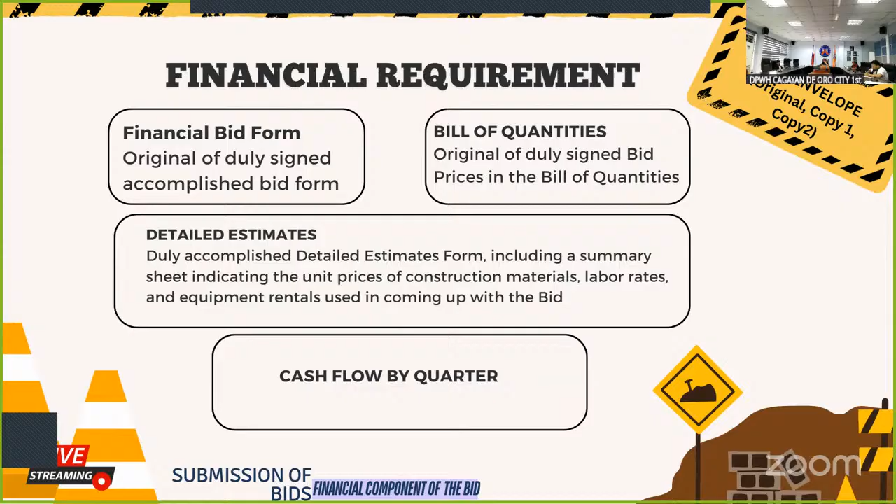So these are the standard forms for the bid form, the bill of quantities, the detailed estimates, and the cash flow by quarter.

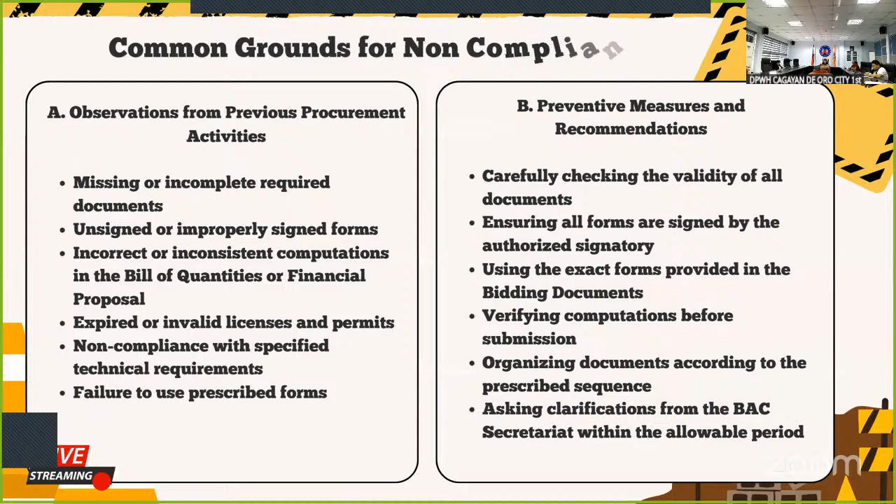Next, we have the common grounds for non-compliant bids. From observations in previous procurement activities, these include missing or incomplete required documents, unsigned or improperly signed forms, incorrect or inconsistent computations in the bill of quantities or financial proposal, expired or invalid licenses and permits, non-compliance with specified technical requirements, and failure to use prescribed forms.

Next, we have the preventive measures and recommendations: carefully check the validity of documents, ensure all forms are signed by the authorized signatory, use the exact forms provided in the bidding documents, verify computations before submission, organize documents according to the prescribed sequence, and ask clarifications from the BAC secretariat within the allowable period.